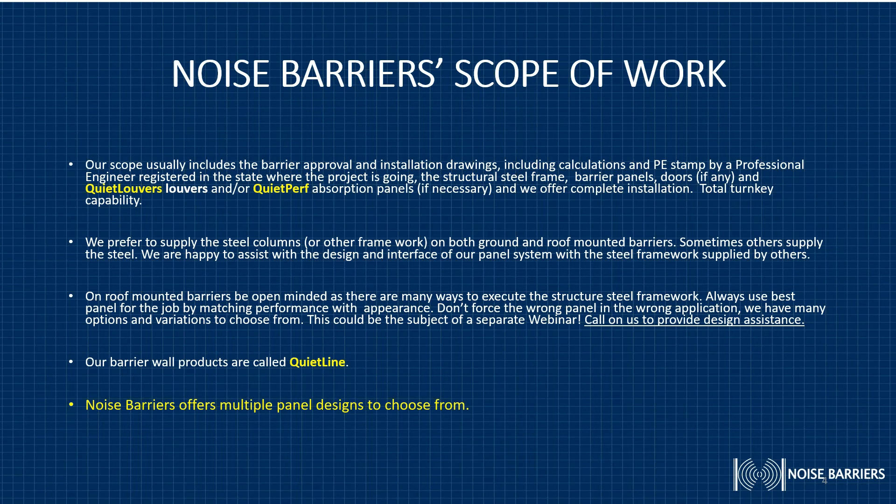So let's start with the main subject for today, and that is our QuietLine barrier system. We offer multiple panel designs for you to choose from. We offer our SL, which is our shiplap panel. We offer a shiplap panel with a reveal, clever names here. We have a shiplap panel with a reveal that's designed to conceal the structural steel framework, we call that our SLR concealer. We offer our V-Stack panel.

We offer our QuietMod HH, which is a panel that has hard surface on both sides of the barrier. It's not typical, but it does come up every so often. And then we also offer our QuietMod panel in an HP configuration, which has a hard surface on one side and is perforated on the noise side.

The purpose of today's webinar is to introduce you to our two unique barrier panel systems, specifically the V-Stack panels and our SLR concealers.

I'd like to tell you about the evolution of the V-Stack panel. When we started the company in 2003, we offered one barrier design, basically the same panel as other suppliers. It was 2 feet high by a maximum length of 12 feet. Well, it wasn't long before architects came to us and said, can you make a panel taller or longer? The reason for this is to cover more space with less installation cost.

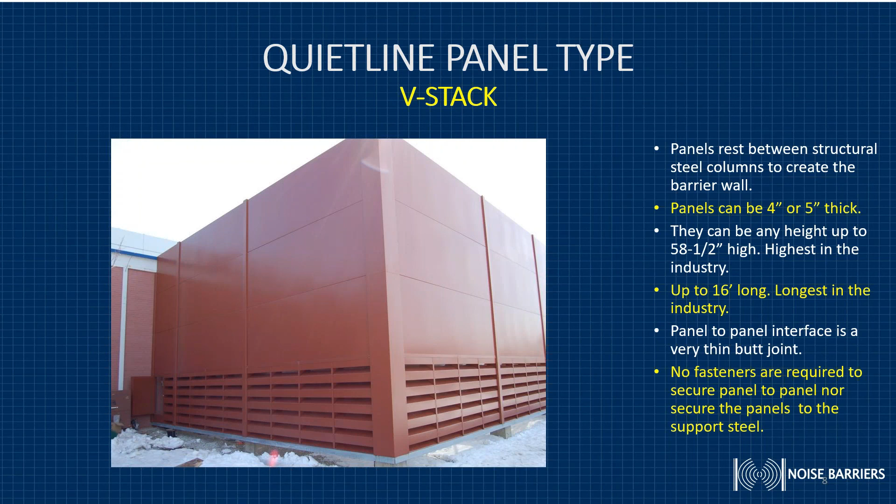This is the highest in the industry. They can be up to 16 feet long, which is the longest in the industry. The panel-to-panel interface is a very thin butt joint. You can see that horizontal seam here. These are 3 panels stacked on top of some louvers. No fasteners are required to secure the panel to panel, nor to secure the panels to the support steel.

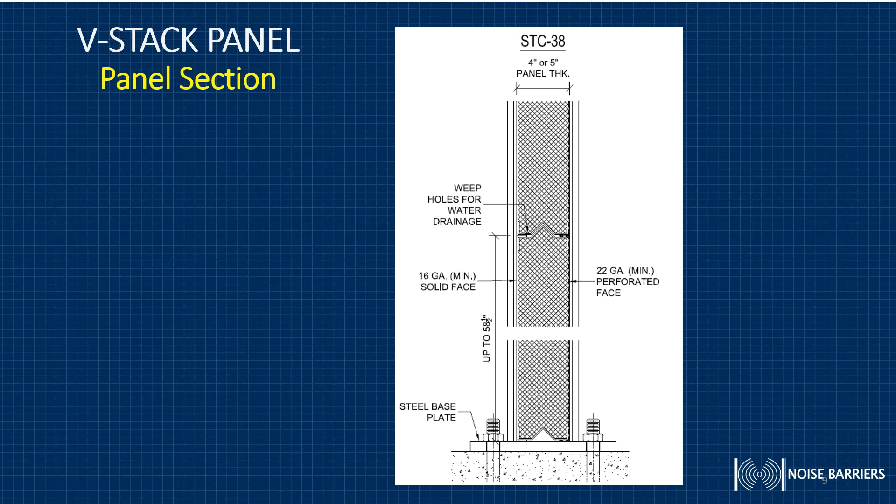This section shows a typical V-Stack panel. You see we've got acoustic fill sandwiched between a 16 gauge minimum solid face on one side and a 22 gauge perforated face on the noise side. The panel-to-panel interface is achieved through an inverted V-shaped roll-form channel that forms the top and bottom of the panel.

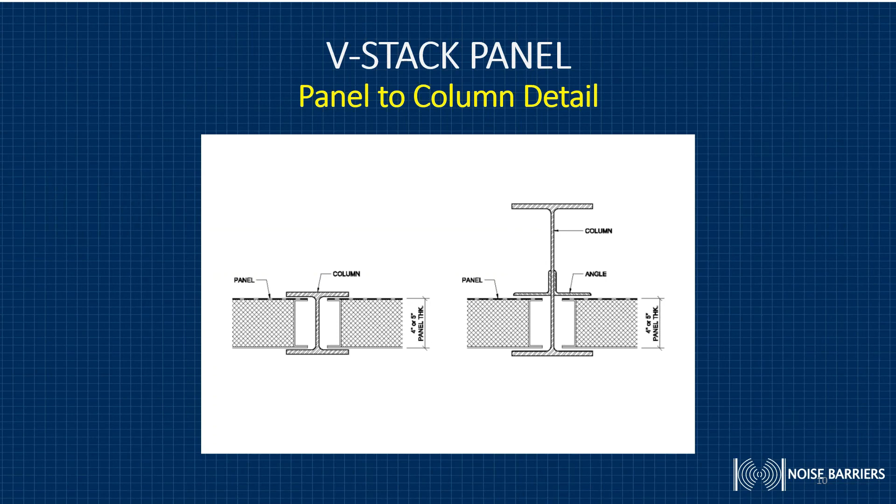The V-Stack panel is designed to fit between either the flanges of the structural column, like you see on the diagram on the left, or in cases where there's a high wind load, where the wall is very tall, a larger column is necessary. So we either bolt or weld angles to the web of a column, and that creates a slot between the angle and the front face, or the inside face of the front flange, to create the slot for the panel to fit into.

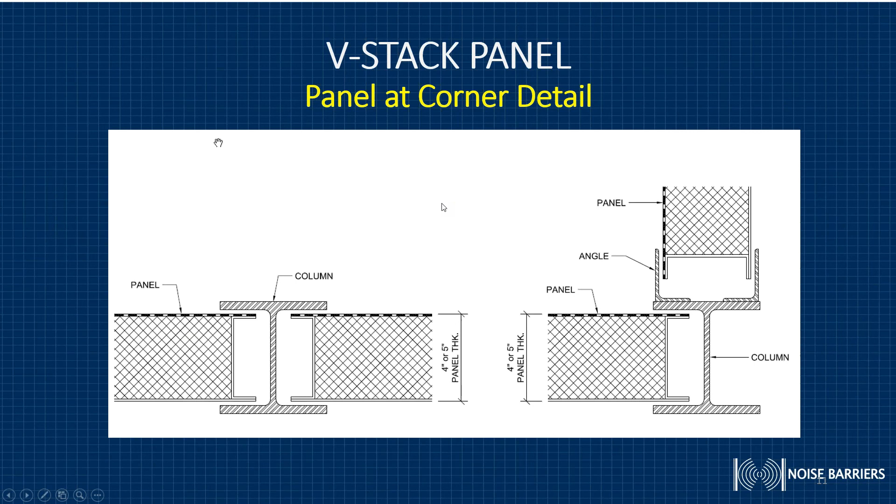When we turn a 90-degree corner, where two walls meet, you see in the right-hand diagram here, we've welded a couple of angles to the back face of the flange of the corner column, creating a 90-degree turn. We can also put those angles in at whatever angle is necessary to create either an obtuse or acute angle for the wall to make a turn, so we can meet whatever the lay of the land is or whatever the conditions on the roof are. Walls do not need to be straight and have right angle turns.

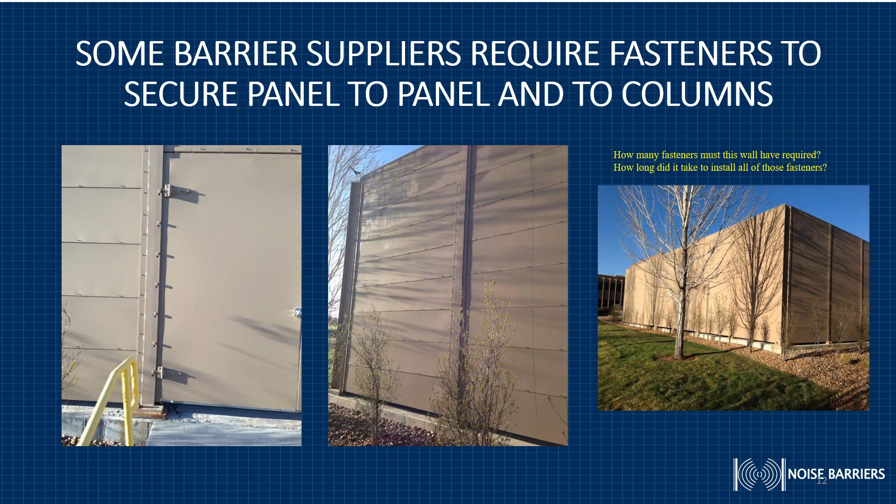Remember I mentioned that we don't need any fasteners to put our panel together. These are some photographs of a project done out in Colorado by a competitor. You can see that they have fasteners to attach panel to panel, and if you look at the left photograph, they also have fasteners attaching the panels to the structural steel. We don't need any of that. Can you imagine how many fasteners this required and how long it took? The bad part about this type of installation is you've now drilled holes in a finished painted surface, and that's going to rust, so the life expectancy of this wall is not going to be good. All of our barrier panels can be installed without the need for fastening them together or fastening them to the structural steel.

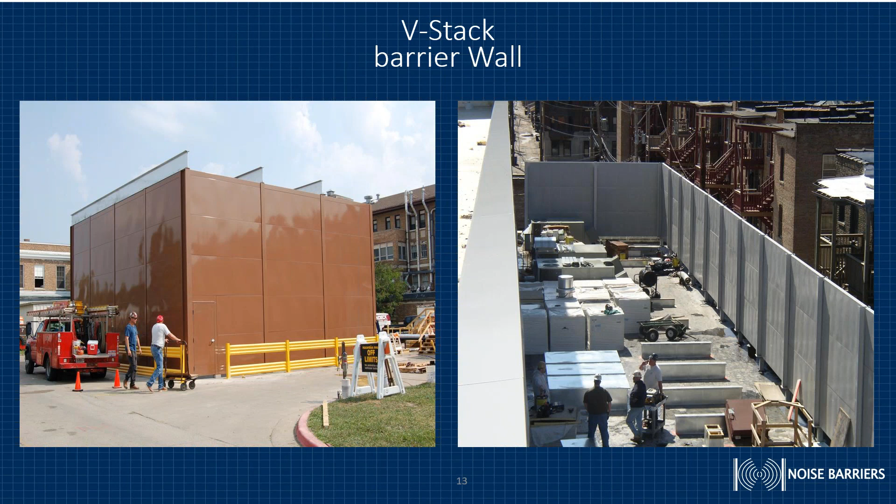Sometimes architects have asked us to put cladding on our walls. I wanted to show you an application like that.

Turns out that doing the cladding this way was actually less expensive than powder painting the entire wall. And what it achieved is a continuity between the barrier walls and other penthouses that are up on the roof that we had nothing to do with.

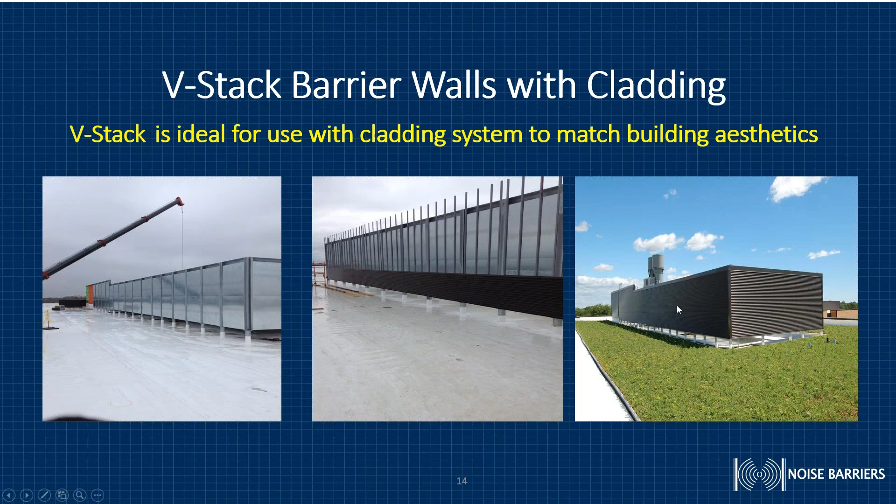This is part of the Chicago green experience, or initiative, to have rooftops with planted vegetation. So it's a very attractive wall on top of a very attractive roof.

So typical uses for the V-Stack panel are in applications where aesthetics aren't quite as critical, because the panels are typically larger and longer. It provides a lower square foot cost barrier than other designs.

It's excellent for applications that require long walls. The 16-foot length requires fewer columns, fewer foundation piers, and fewer panels to install, all factors that reduce labor time and overall project costs.

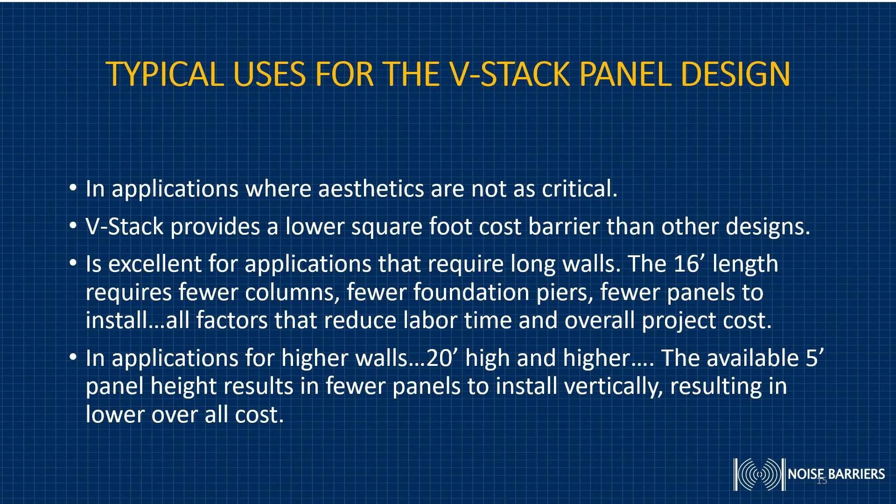In applications for higher walls, V-Stack is also excellent because the 5-foot panel height results in fewer panels that need to be lifted into place vertically, resulting in a lower overall cost. I'm going to show you an example of that.

This is the old way we used to do these walls, 2 foot by 12 foot. This is a 48-foot long wall, 20 feet tall. There are 4 bays of panels, a total of 40 panels, and 5 columns.

Each of those panels takes about 20 minutes to put in, without our lifting mechanism that we've developed, which we'll show you later. So it takes a long time to put this up, there's a lot of lifting that has to be done, and of course there's 5 columns.

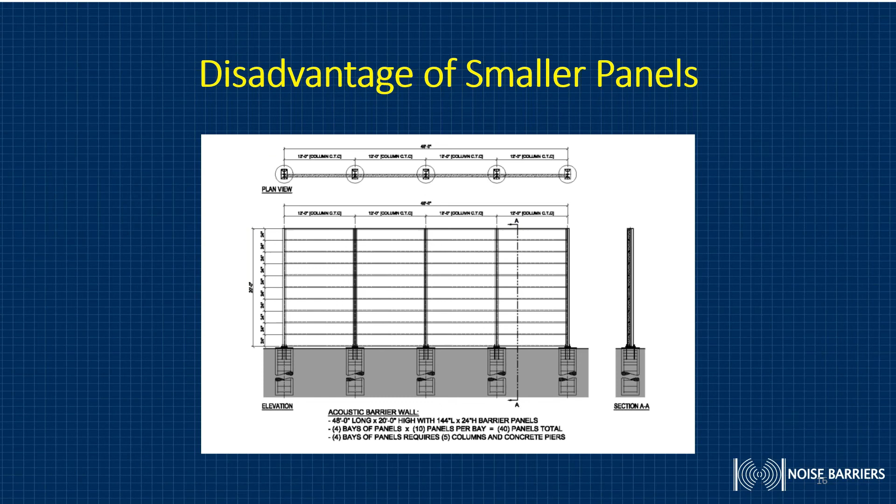We can do the same length and height wall with our V-Stack panel by making the panels 5 feet high by 16 feet long. It reduces the number of bays from 4 to 3, and reduces the number of panels from 40 to 12.

It also reduces the number of columns and piers from 5 to 4. All of that saves a lot of money.

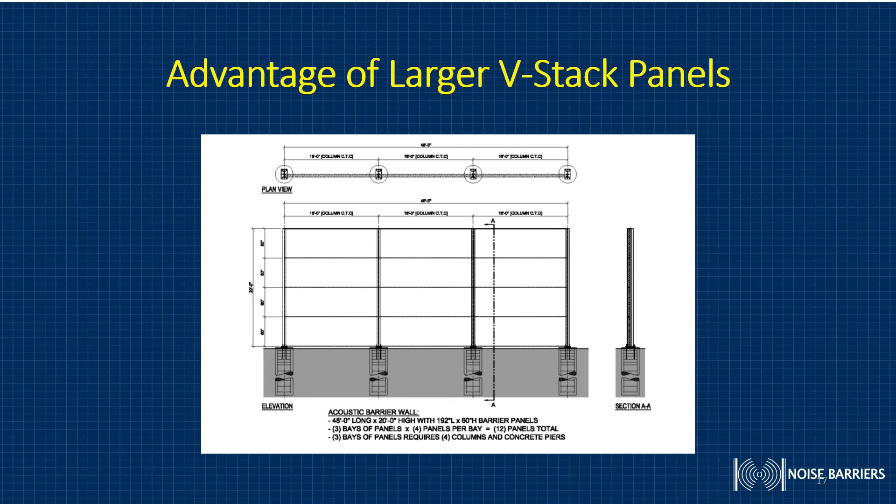Each of these panels can be set in place in under 10 minutes, so it's a much faster installation. And again, we're going to show you a video shortly that will demonstrate this.

So the V-Stack became a very popular and successful panel for us, but we did eventually have architects come to us and say, can you give us a panel that's more linear appearing, going back to the old way we used to do it? And we came up with our shiplap panel.

That panel we introduced was successful. Many architects used it, but other architects said, can you add a reveal to that so we can tie it into the appearance of the building? So we developed our SLR, which is a shiplap panel with a reveal.

Wasn't too long after that when somebody asked if there was a way to make this panel conceal the structural steel instead of slipping down between the flanges. So that's when we developed our SLR concealer, and this is what it looks like.

The concealer panels are designed to conceal the column by sliding over the column flange. These panels are typically 5 inches thick and generally 24 inches high. We can go a little bit higher, but typically 24 inches.

They can be up to 16 feet long. The panel-to-panel interface, both horizontally and vertically, is a 1-inch reveal, which you can clearly see in this photograph. No fasteners are required to secure the panels to panel or to the support steel. It creates a very attractive looking wall.

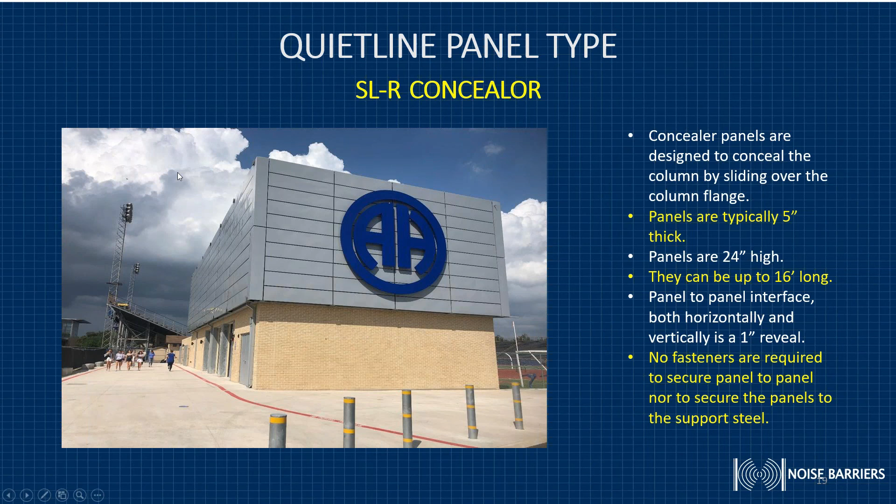In this section, again, we have acoustic fill sandwiched between a solid skin and a perforated skin. In this panel, we achieve the panel-to-panel interface by a channel that we make, creating the 1-inch reveal that you see between the panels.

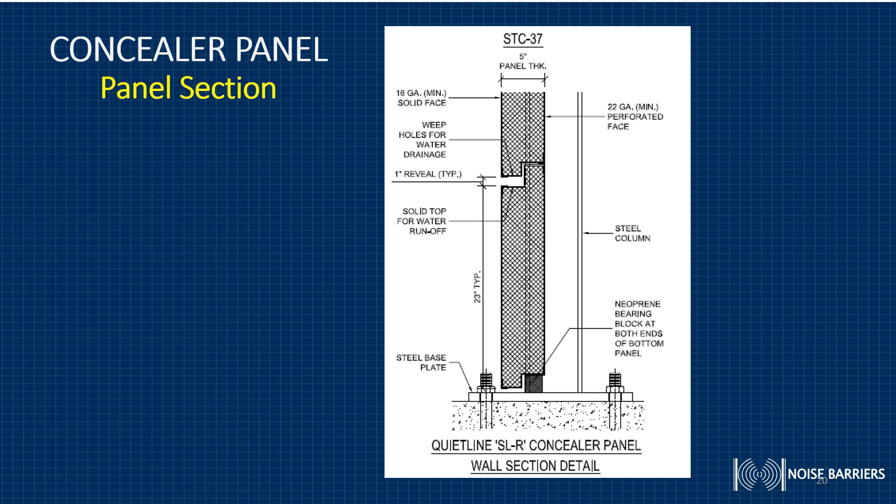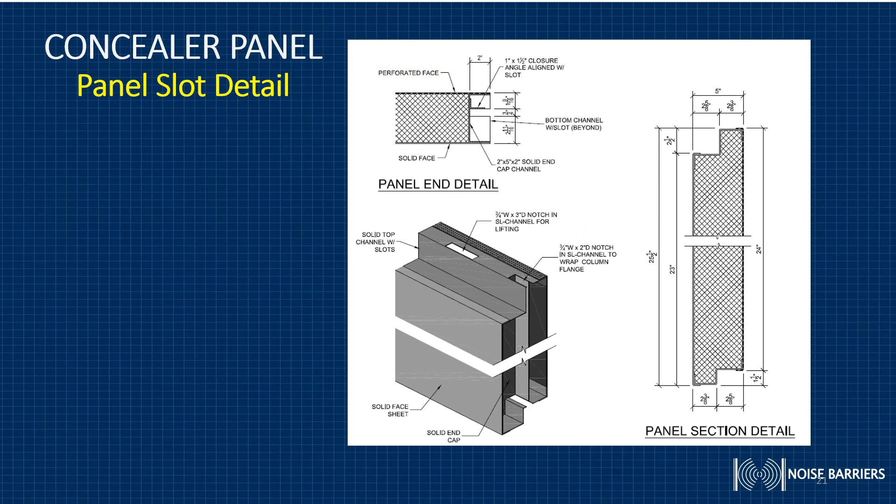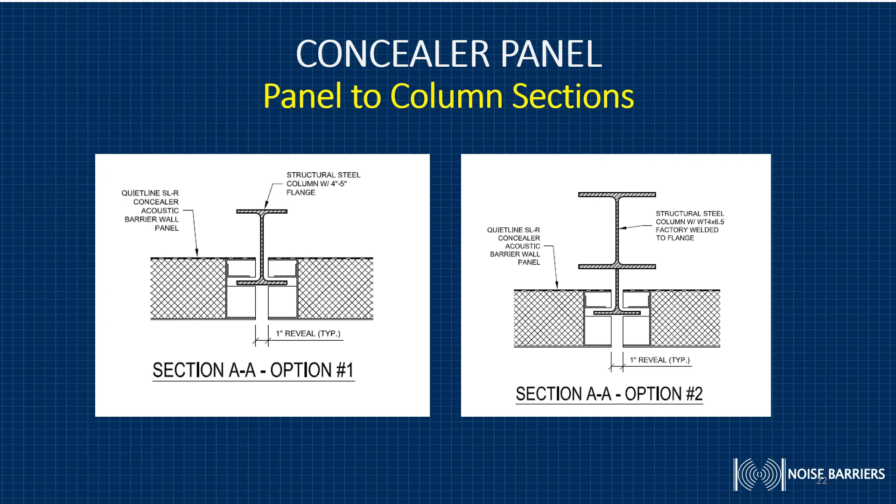In some installations we have option 2, where the architect wanted the wall to hang over the host building wall just a little bit. This was achieved by welding a structural T to the flange of the support column, and then the panels were installed proud of the host building wall. You'll see that in just a second.

Another major difference of the SL, our concealer panel, is how we do the corners. We have a preformed corner, a 2-foot by 2-foot corner panel designed to create a sharp right angle turn. We can also do acute or obtuse angles if a wall is going to have a turn to it. But this is what the corner looks like.

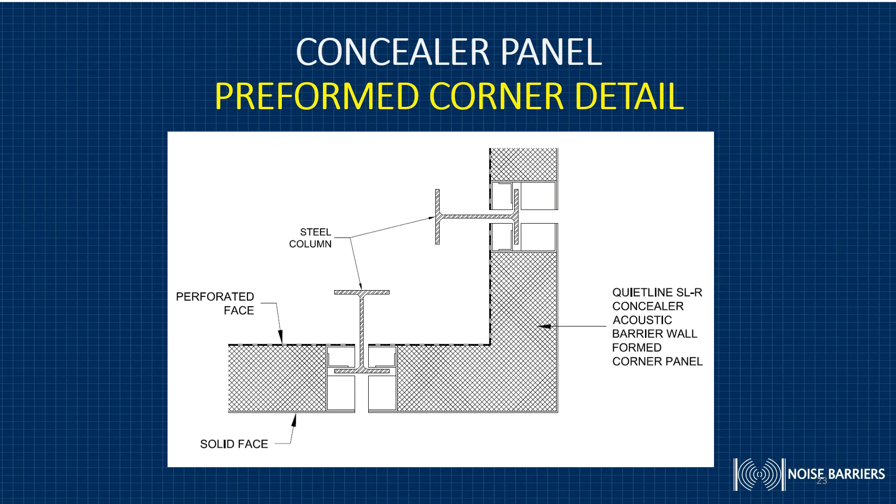And here it is in an application. This happens to be at a school in a suburban community. Immediately to the left of this barrier are homes that were affected by new mechanical equipment installed on this roof. The architect wanted the panel to hang out over the wall a little bit, so this is where we use that detail that I showed you in option 2 a couple slides ago.

Please notice the uniform horizontal and vertical reveals, and the finished corner appearance that we get. You can see here on the far side to the left, we also can include a door in this panel system as well.

So the difference between the concealer and the other way of doing it is what you see with these two photographs. The photo on the left is basically a 2-foot by 10-foot long panel, and you can see the panels are slid between the flanges of the column. You have an exposed corner, and you can see the structural steel. If we'd had the concealer at that time, the look they would have had is what you see on the right. I think we can agree that that's a much cleaner line and is much more attractive.

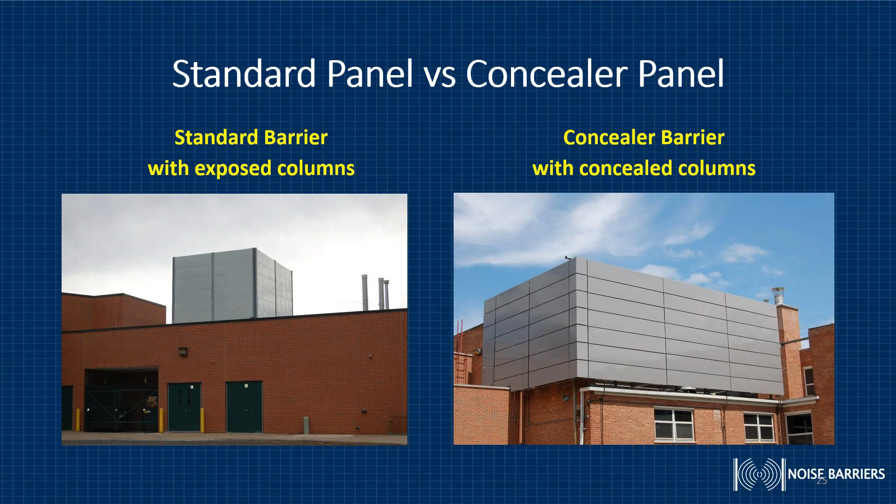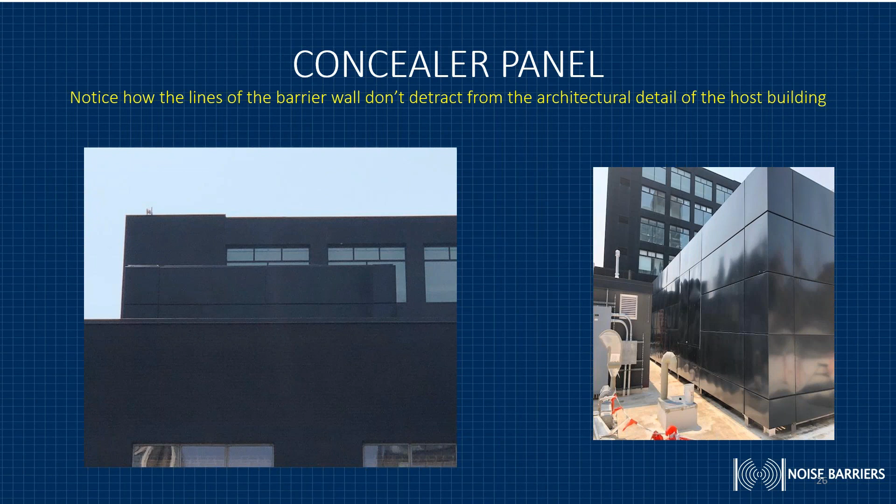The other advantage of the concealer panel is it can really complement the building architectural design. Here you see the horizontal and vertical reveals are in concert with the horizontal and vertical lines that the architect has designed into the building windows and face of the building. So it complements the building very well. It doesn't stand out like a sore thumb that's been added, but in fact looks like it's part of the original design.

The typical uses for the concealer panel are applications where aesthetics are more critical. We can match the reveal in a building design, conceal the structural support system, and the preformed corner panels provide a nice finishing detail.

This panel is excellent for applications where weight's a factor, because it can be constructed using lower weight aluminum when barrier weight is critical. It's excellent for walls that are going to be exposed to the salty air around the ocean.

This system provides a cleaner appearance than other panel profiles, and for applications with long walls, the capability for 16-foot long panels requires fewer columns, fewer foundation piers, and fewer panels to install. Again, these are all factors that reduce labor time and overall project cost.

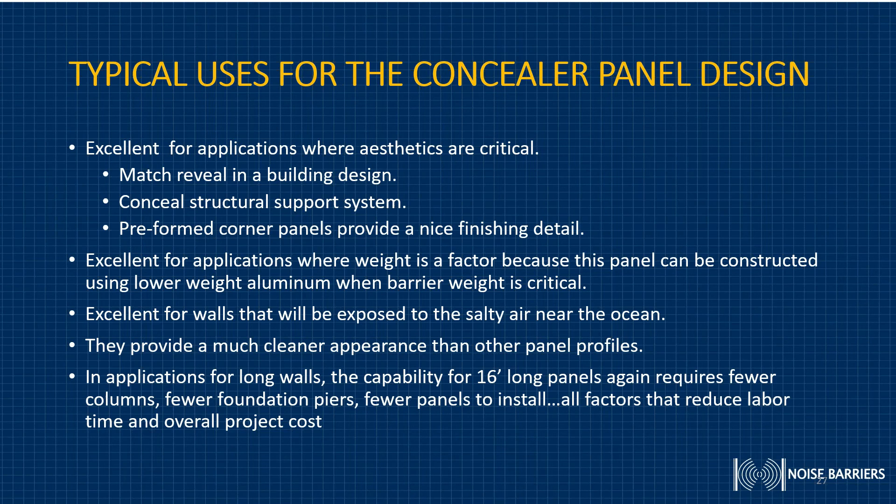With regards to the acoustic performance of these two wall panels, they're both very similar. The V-Stack has an STC of 38. The Concealer panel has an STC of 37.

This is better than our old original panel by several points, because of the V-Stack interface, or the shiplap interface, that we came up with. In both cases, the noise reduction coefficient is 0.95, so these are both better than most panels in the market.

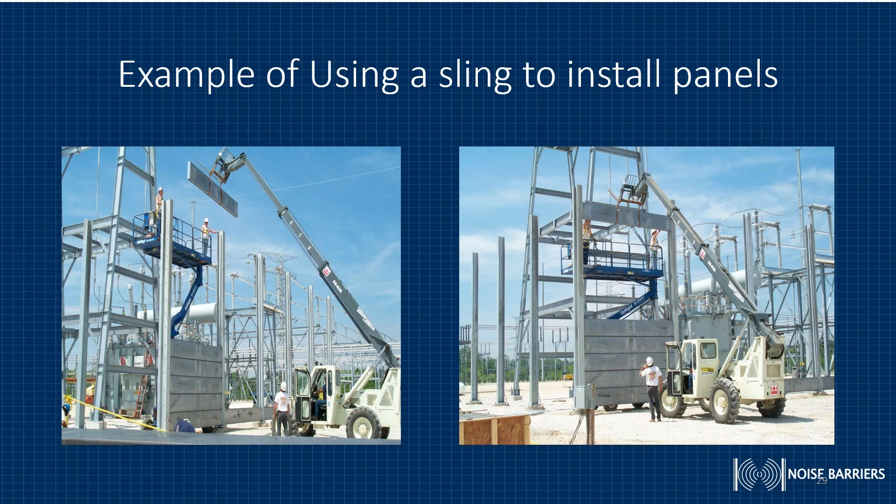Not only is this time consuming, it's incredibly dangerous. It's very easy for a worker to get a finger or a hand caught in there.

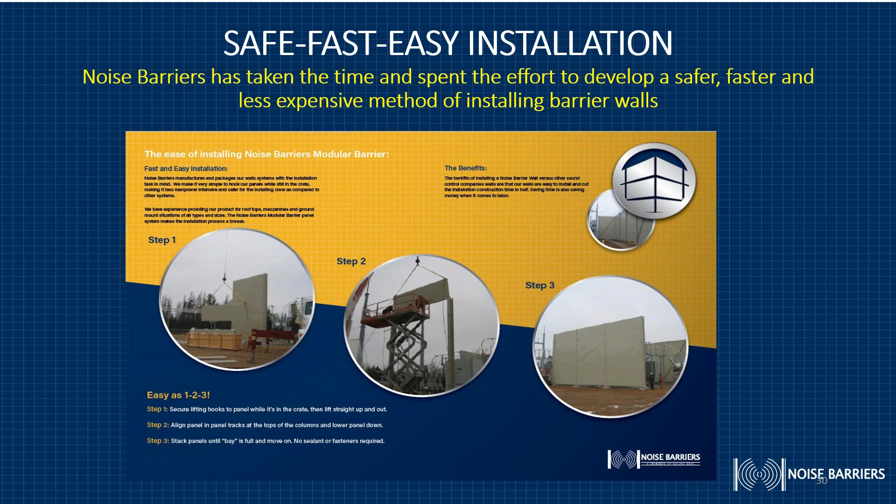Then workers just have to remove the clip from the lifting slot, and the panel fits snugly into place—no fasteners necessary. This is a much safer and much faster method of installing these panels.

We have a short video I'd like you to view with this. This particular video will show you how the panel gets lifted into place. This is available for use by contractors if they want to install the panels themselves, or by architects.

Introducing QuietLine V-Stack Barrier Walls by Noise Barriers. An easier, safer way to install noise barrier walls. Please review the installation packet in the crate and consult the install documentation for a list of tools needed. Columns are set in place and fastened to existing or precast anchor bolts.

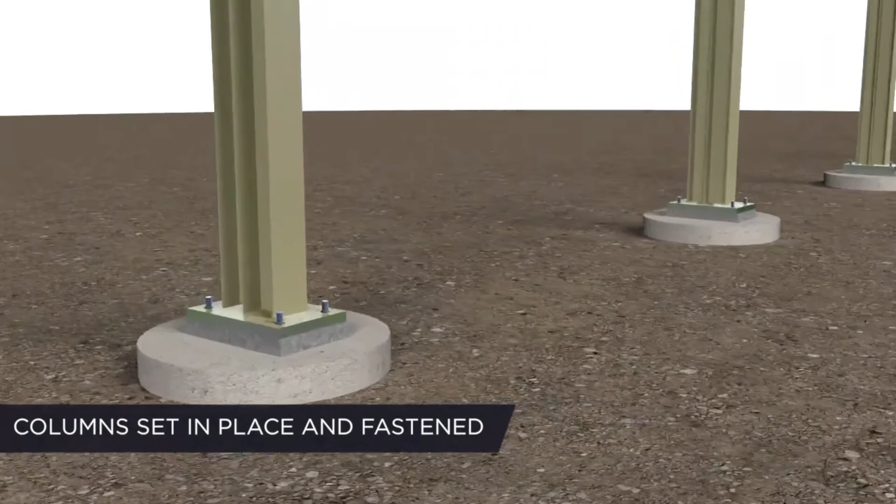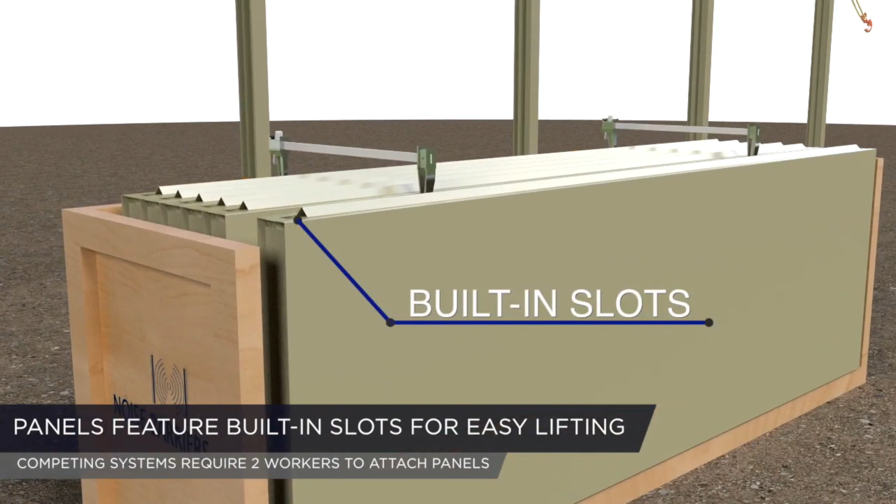When the V-Stack crate arrives at the job site, it is placed on level ground and braced so it won't tip over as the load becomes unbalanced. Before removing the first panel, clamp the remaining panels together to prevent them from falling over. The V-Stack panels feature built-in slots for easy lifting and are designed to be lifted directly out of the crate, while competing systems require two workers to lift, temporarily support, and install straps for lifting.

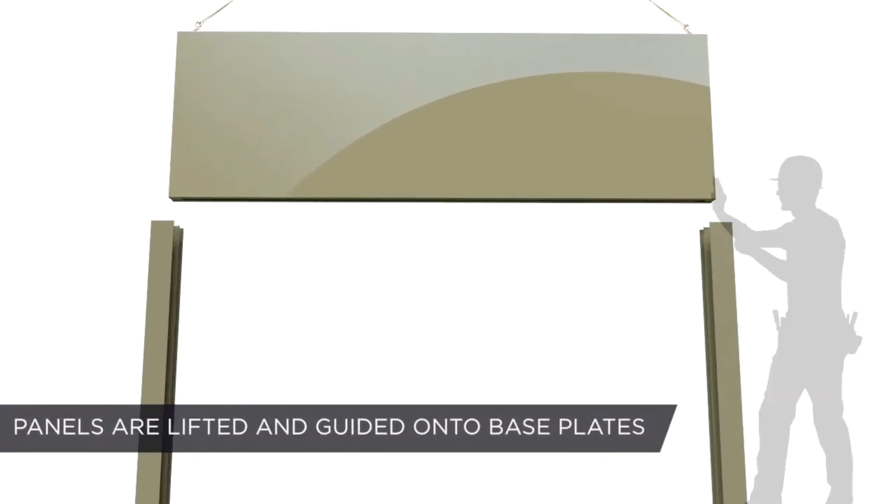The panel is lifted and guided between the columns, coming to rest on the base plate. The hooks are then simply removed to complete the panel installation. Other systems require two workers to perform the tedious and slow process of temporarily supporting, unstrapping, and then placing panels.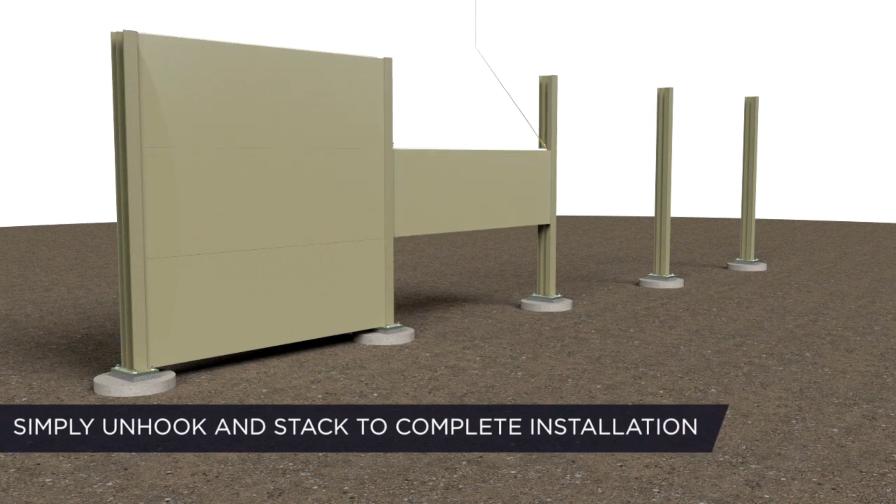V-Stack installation requires no fasteners. There is no time wasted supporting, strapping, and unstrapping panels. Simply unhook and stack. To build better, smarter noise barrier walls, visit us online at noisebarriers.com.

So that shows just how easy it is to install these walls. A typical strapped panel requires, besides the person on the hoist, two men on the ground and two men up high to guide the panel into place, and it takes in the neighborhood of about 20 minutes to set a panel. With this lifting slot, you need three men, and they can set a panel in under 10 minutes.

This lifting slot mechanism that we use is available on and is a standard part of all of our barrier wall panels.

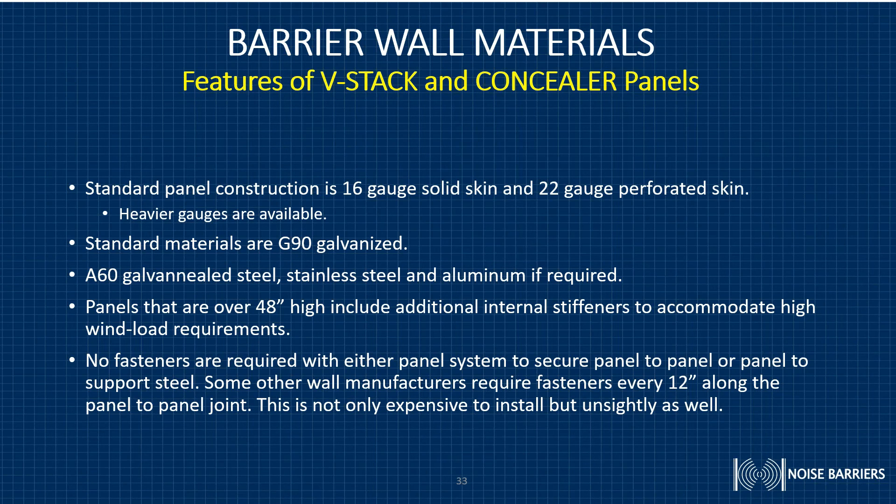When we make panels over 48 inches high, we include additional internal stiffeners to accommodate the high wind load requirements that professional engineers require. No fasteners are required with either panel system to secure panel to panel or panel to support steel. Some other wall manufacturers require fasteners every 12 inches along the panel joint, and as we saw earlier, that's not only expensive to install, but unsightly as well.

Our walls are all available with a durable powder paint finish in any standard RAL color. We can custom match colors if necessary. We have the longest warranty in the industry: 5 years for materials and 10 years for the finish against peeling and cracking. All of our barrier panels include weep holes along the bottom edge for water runoff.

Some walls may require personnel doors, as we said earlier, or a single or double leaf door for equipment access, or they may require louvers for additional ventilation. We can handle all that.

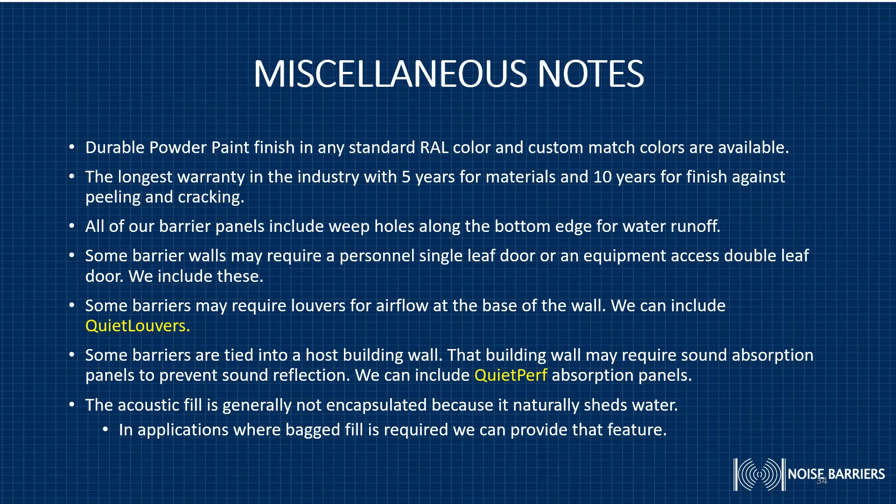In some applications, it's necessary to put absorption on a wall adjacent to a host building wall, where the sound might hit that host wall and bounce over it. So we treat that with our QuietPerf absorption panels. Generally, acoustic fill is not encapsulated; it doesn't need to be because it naturally sheds water and won't deteriorate. But in applications where bag fill is required, we can provide that.

We've developed 3 different pieces of literature depending on the market being addressed. We have literature addressing barriers for architectural and industrial applications, literature specifically geared toward the power and electric utility industry, and literature that deals more with transportation applications.

The advantage of our barrier walls is we have turnkey capabilities. We do the design, the PE stamp, the structural framework, the barrier panels, the doors, the absorption if necessary, and installation services. Most importantly, we listen and we're flexible. We've developed these products because customers came to us and said, hey, can you help us achieve this appearance? We offer the longest and tallest individual panel sizes available, which reduces material, steel, and labor costs. We've developed a fast and very safe method of installing panels, and we have 6 different panel configurations to meet architectural and acoustic performance requirements.

For applications that are long or high, use the V-Stack. It's by far the most economical panel system on the market. If you need something more aesthetic, the SLR concealer is the best looking panel system on the market today, and we would encourage you to use that.